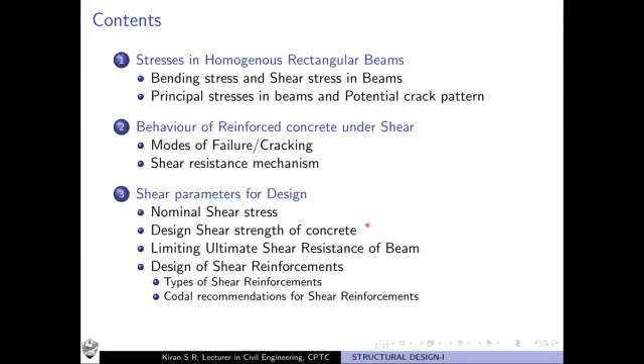Let us study about the design for shear. In this class, we will study about the stresses in a homogeneous rectangular beam, the principal stresses and the potential crack patterns associated with such beams. Then we study about the behavior of reinforced concrete structures when subjected to shear and the important mechanisms involved, including the parameters of design, important terms, and the codal provisions associated with it.

First, let us study about the important stresses which develop in a homogeneous rectangular beam. What do you mean by homogeneous rectangular beam? It is an idealized beam which is composed of only one particular material. It is a homogeneous beam. It has properties the same throughout it. So we have already studied about the homogeneous rectangular beams when subjected to bending and the important stresses which develop in such beams.

In your subject on theory of structures, you have studied what are the important stresses which develop in such beams. They are bending stress and shear stress. So in the basic mechanics of material, we find that any homogeneous rectangular beam will develop two kinds of stresses. One is bending stress, or we call it flexural stress, expressed by Fx. And there is also shear stress which develops in the beam, which is represented by the notation tau.

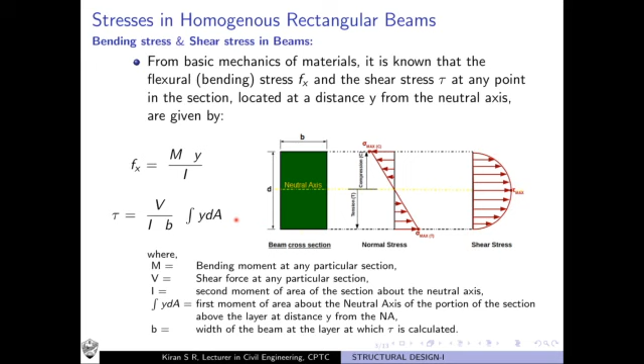So every homogeneous rectangular beam, we know, develops bending stress as well as shear stress when subjected to external loads. So see, here we have a beam subjected to loads, and if you take any point on the beam and zoom in, you will find that this point will develop the bending stress Fx, otherwise called normal stress Fx, and shear stress tau. And we know that a combination of both bending stress and shear stress is acting at this particular point.

And if we resolve it such that we get stresses which are perpendicular to the planes or normal in nature, we call them principal stresses. So you have already learned about principal stresses. The principal stresses are stresses which are normal in nature. They are not shear in nature. So the planes in which principal stress acts don't develop shear stress.

So instead of a combination of bending stress and shear stress, we are replacing this element by another element which is subjected to principal stresses F1 and F2 only. And whatever is the effect of this combination of bending stress and shear stress, the same is generated by this set of principal stresses F1 and F2. And you might remember that we had two types of principal stresses. One is the major principal stress, another is the minor principal stress. This is exactly what we represent by F1 and F2.

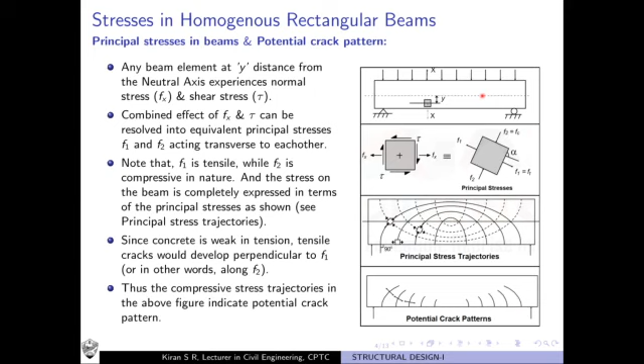Now we need to know how concrete behaves under shear. We have already studied that any beam subjected to loads will develop bending stress as well as shear stress. We have already studied the design of beams subjected to flexure or bending, and we have designed such beams for bending moment. But now we need to study how to design a beam for shear stress. So that is exactly what we are going to learn.

But before we proceed further, we need to know the ways reinforced concrete undergoes failure or cracks. So what are the different modes of failure or cracking? There are 4 important ways in which cracks can occur in reinforced concrete structures. First one is flexural crack. You see this figure? These are typical flexural cracks. These cracks are likely to occur in beams where high bending stress and low shear stress occur.

So beams in which bending stress is high and shear stress is low experience flexural cracks like this. The speciality of these cracks is that they develop at the extreme tension fibers and propagate towards the neutral axis. And in which direction? They propagate at a direction 90 degrees to the neutral axis.

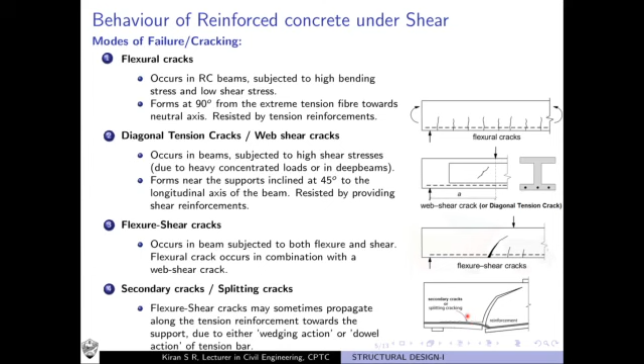Initially, the concrete undergoes a crack at the extreme tension fiber, which is what we call the flexural crack. But as you keep increasing the load, the crack moves closer to the neutral axis. It inclines and becomes 45 degrees, and it is now a shear crack. So overall it is a flexure shear crack which we obtain. Now in this situation, how is the shear getting transferred by the beam?

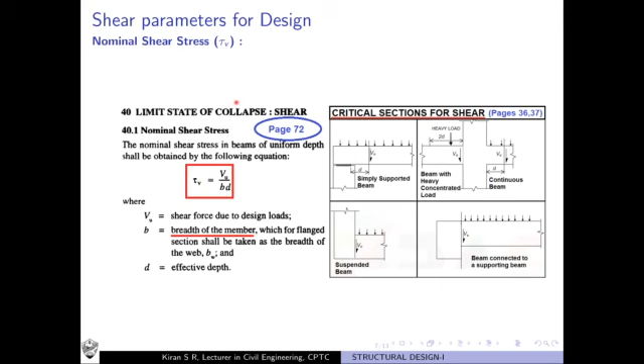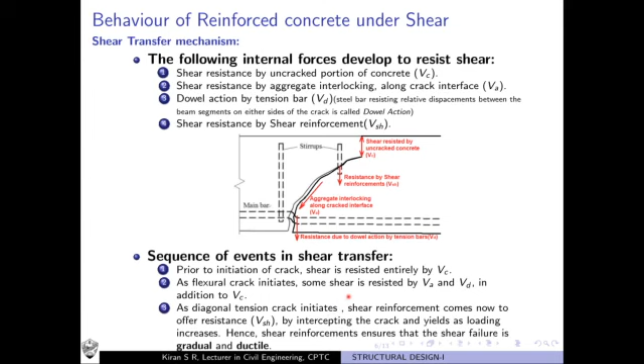Now coming to the next important terminology, that is the design shear strength of concrete, tau C. What is this tau C? Tau C is the maximum shear stress that the reinforced concrete beam can resist without shear reinforcement. We already told that in the mechanism of shear transfer, shear reinforcement plays a very important role. They ensure gradual and ductile failure of the beam when subjected to shear. Okay, so shear reinforcement is very, very important.

But if without shear reinforcement, what is the maximum shear that the beam can resist? That is exactly what is given by the parameter design shear strength of concrete, tau C. So how do you find tau C? As per page number 72, clause 40.2, the design shear strength of concrete in beams without shear reinforcement is given in table 19.

So tau C, the design shear strength of concrete, is the maximum shear stress which the beam can resist without shear reinforcement, and can be obtained from table 19 on page 73. Now how to design for the shear reinforcement? What happens if tau V is less than tau C, or greater than tau C? Tau V is the stress developed in the beam due to externally applied loads, and tau C is the maximum stress it can resist without shear reinforcement.

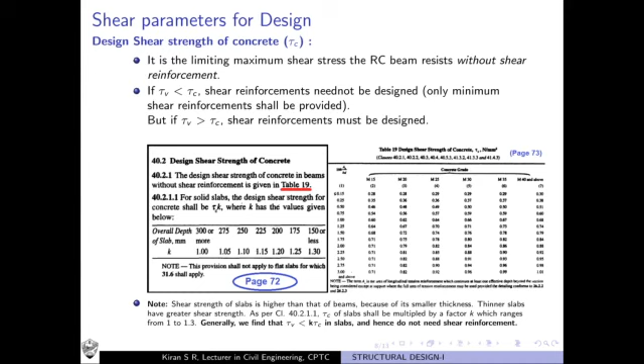Now the third important terminology is the limiting ultimate shear resistance of beam, tau c max. We learned about tau c, the maximum stress the beam can resist without shear reinforcement. But even with shear reinforcement, what is the maximum shear stress the beam can resist? That is tau c max. So we learned about tau v, tau c, and now tau c max, the maximum shear the beam can resist even with shear reinforcement.

But we must wonder why we need a maximum shear stress even with shear reinforcement. Why do we have a maximum shear resistance of beam?

This is because of the following reasons. We might feel that as you increase the shear reinforcement, the maximum stress that the beam can resist will also keep increasing, isn't it? But it is not just so, because if you keep increasing the shear reinforcement, the beam loses its ductile nature.

When we studied the over reinforced section, we already learned that with a lot of steel reinforcement, that is exactly why we call it over reinforced section, a situation might arise where the over reinforced section will behave in such a way that concrete crushing occurs well before yielding of steel. So it is an undesirable section.

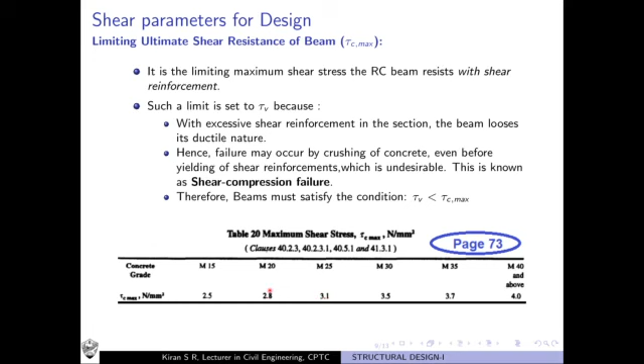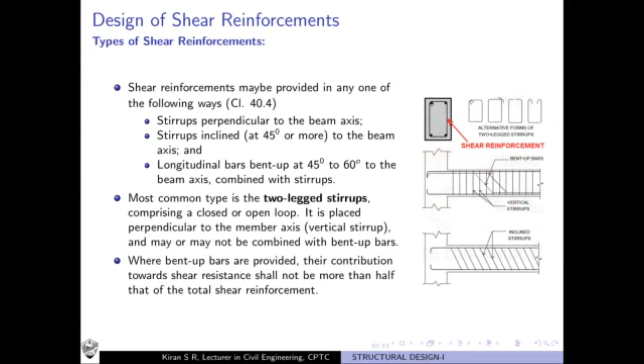What is Sv? Sv is the center to center spacing of stirrups along the length of the member. So between the adjacent stirrups you have center to center spacing. This you have to find out. Now the phi value, if it is not given in the question, you can assume a suitable diameter of stirrup. Generally 8 mm diameter stirrups are used. So if everything else is known, you can determine the Sv value, the center to center spacing between stirrups.

And one thing to be noted is that for vertical stirrups, there is a limit to the spacing of stirrups. The maximum spacing between stirrups should not exceed 0.75 times effective depth or 300 mm, whichever is minimum. So the maximum spacing between adjacent stirrups is 300 mm or 0.75 d, whichever is minimum. You can refer to this clause on page number 47 for reference.

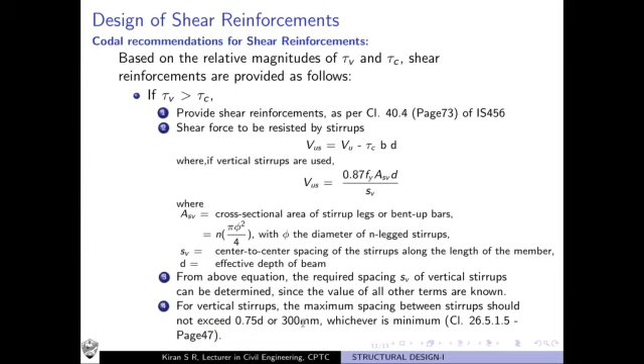Now what happens if tau v is less than tau c? We said the shear stress due to the applied force is tau v. So if it is less than tau c, the maximum that can be resisted without shear reinforcement, then normally we don't require shear reinforcement at all. But in certain situations we have to provide shear reinforcement, and then minimum shear reinforcement is provided. Not as we designed in the previous case; we provide shear reinforcement only to a minimum requirement.

Here the Asv value, you know how to find it; it is already given here. b is the width of the beam, and Sv is the spacing. So you know everything except Sv. Bring the Sv term to the right hand side and every other term to the left hand side. That will give you Sv is less than or equal to some value, which gives the required spacing, the maximum spacing that can be used for shear reinforcement in such beams. That is how you provide minimum shear reinforcement in beams.

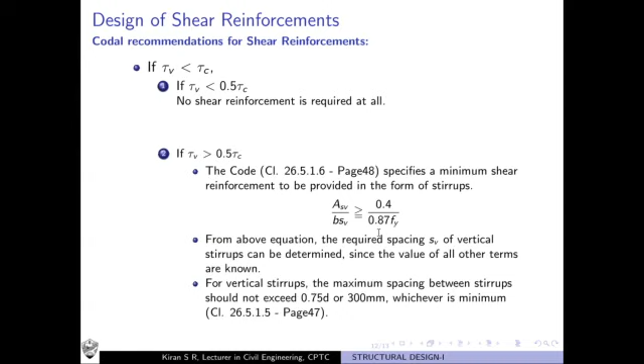Again, keep in mind the maximum spacing between stirrups should not exceed 0.75 d or 300 mm, whichever is minimum. This is applicable to this case also. Okay, so now we will solve a couple of numerical examples and you will get a better grasp of it.